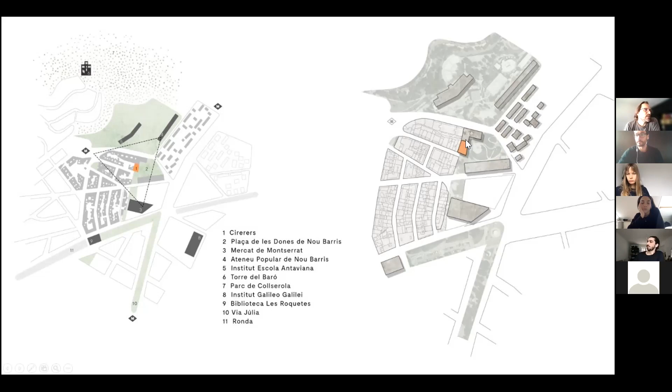So one of the main objectives of this project was to try to articulate these two kinds of cities that are very different, because we were just in between. So one of the main decisions related to this aspect was to maintain the skyline of this street with this kind of auto-promoted dwellings. Normally these are family houses where at the beginning it was one only property, and the sons and daughters were building upper stories, and now they are a little bit of a mixture.

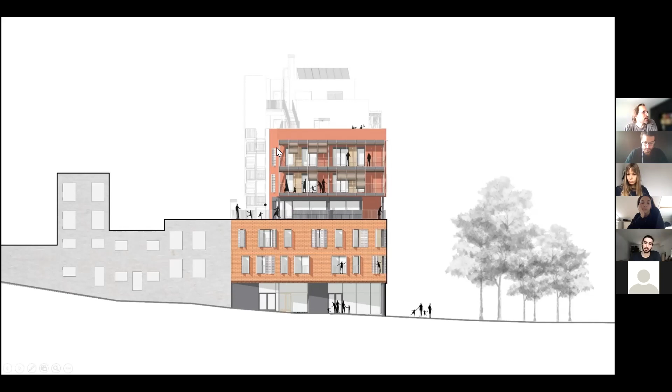One of the main decisions of our building was to maintain this skyline, and also a second decision, very important, was not to continue here with the party wall. We could have continued with this party wall up, but we decided to retire it so that we could offer to this street and to this neighborhood not a party wall that is blind with no texture and no life, but offer a real facade where there is a stair, an open stair, and windows of these dwellings. So these were the two main decisions.

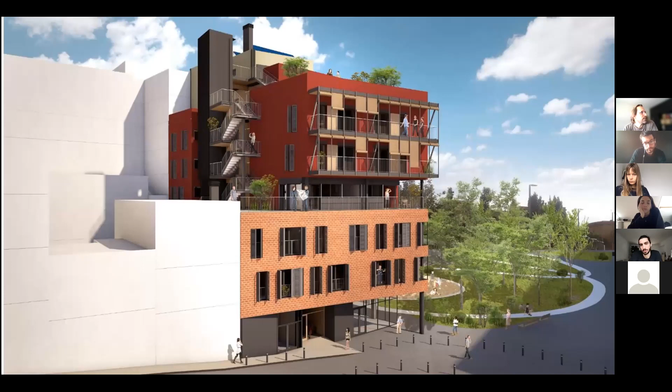Now it's finished. Last week we could certificate the finish of this building, and here you can see with these colors and textures this determination of how to deal with this connection in terms of neighborhood, and this color a little bit reflects also this intention. If we see Barcelona from the top, we will see mainly two colors.

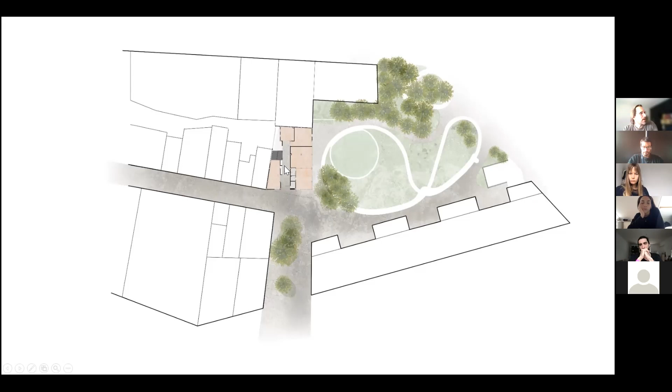What is the objective of all this? This ground floor is designed so that this interaction between the neighborhood and the community is possible and visible. Also interesting is that the street tile that we have in Barcelona gets into the building, into this corridor you can see here in gray, and it continues upstairs. We will see this now.

This is the landing of the stairs, and from this place you can enter the different apartments, which we don't call apartments, we say privative spaces, but I'll call them apartments so it's easier now. This street landing zone wants to be a space of extension of these privative spaces.

Most of these dwellings are very small, about 40 square meters, and this street landing area we're talking about is also 40 square meters. Here we have the clothesline and washing machines, so people come out to do the washing and hang clothes. It wants to be like a street, the typical Mediterranean street of a village where children play and old people can sit with a chair and table to play cards.

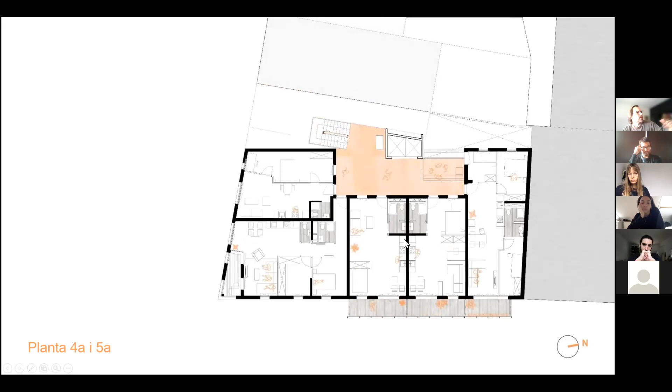This is the 4th and 5th floor, where we've detached from the wall that borders the building next to us. As we go up to the 6th floor, the building retreats and moves toward the mountain, following the slope of the north side of the city where Collserola, the mountain, is located. The urban regulation permitted a 7 or 8-story building, but the stories had to follow the slope of the mountain.

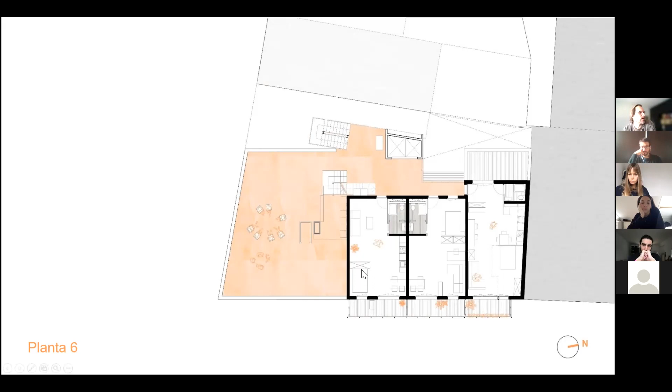For instance, on the top, the 7th floor, we have a gardening space, or community gardening space. On the 6th floor, there's a space to eat and even cook, and to have fiestas — you know, Mediterranean culture.

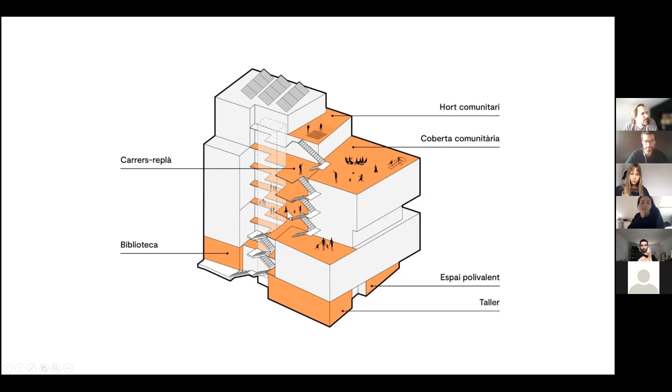And on the 3rd floor, there is another space. Nowadays they've focused it into a space for children on this intermediate floor.

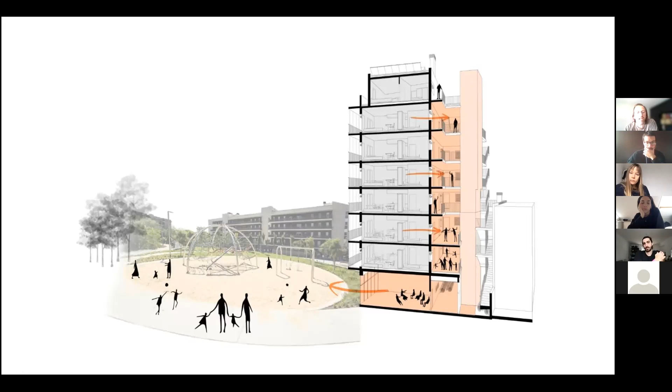Here are some images of the building when it was still only in wood, with the community that will be living there. These people participated not only in the design process, but also visited the works and took part in all the different stages.

Finally, related to the community's engagement and Celobert's commitment to the climate change crisis, we focused on two main strategies. One is related to the use of organic materials and dry construction systems. This decision is very important in terms of economy — we can talk about it later if we have time. The main materials of this building are low carbon, or even positive carbon, materials.

The main material is cross-laminated timber. At this time it's the highest timber building in Spain, though this won't last very long since there are new projects of 8, 9, 10-story buildings. You have to think that in Spain, construction in wood is something very new, nothing like in North Europe.

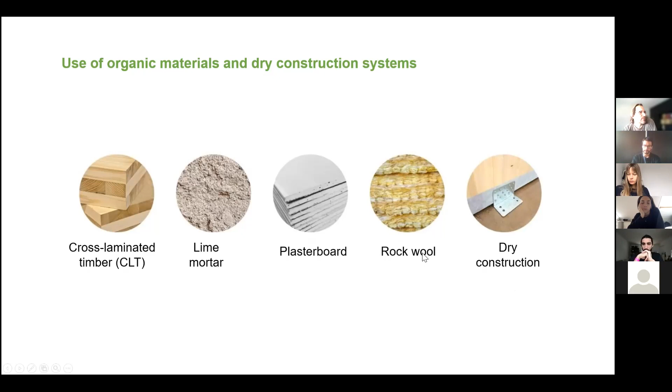Mainly cross-laminated timber, lime mortar in the facades, plasterboard in all the partitions, rock wool and fiber wood for all the insulation — acoustic and thermal. This is also quite special about this building: the commitment to dry construction, so that when deconstruction and recycling have to be done, it's easy, low energy demanding, and really recyclable.

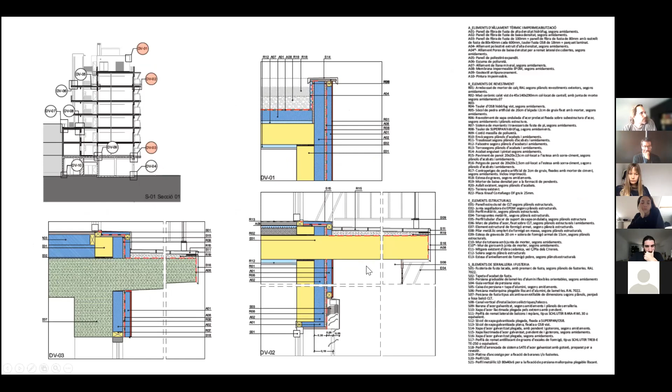Here's an image of one of the apartments before finishes, and another image of this building from the square I've been talking about. Some images of the structural function, and some images of the executive project. Afterward we can talk about all these issues if they're interesting for you.

Here are some images of this dry construction system. All this you see is like a substructure made of paper with gravel introduced inside, placed here because of acoustic requirements.

Here are other images of these wooden spaces. Before closing with plasterboard, all the insulation, the acoustic insulation that has been required here was installed. At the end of the day, the only part of wood visible is the facade wood, because the facades are the element that has less acoustic requirements.

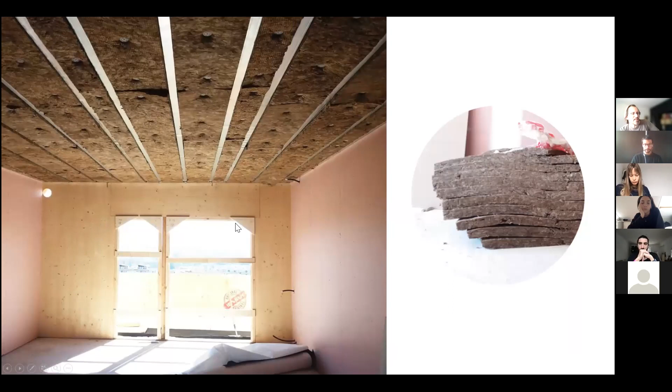Finally, another important issue, apart from the materiality of the building and all the other aspects, is all that is related with minimum energy demand. In this case, our building has been designed with passive house criteria. We are talking about compactness and insulation, a big amount of thermal insulation.

The airtightness means the tightness to the passage of air. Each apartment by itself is tight in terms of air passage. All the apartments have cross ventilation.

We have solar energy, photovoltaic energy, solar on the roof that is community, a community installation. Another very important element is solar control, elements that permit solar control, very important in our latitude. And also the double flow ventilation system that allows this building to not have a special climatization system.

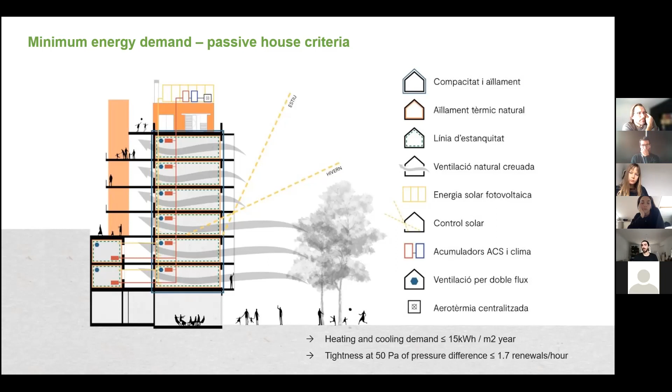In terms of energy demand, if we compare this building's consumption with what is established by the Technical Building Code of Spain for near zero emission buildings, we are reducing the primary energy by 50%, which is the maximum that this Technical Building Code establishes. But if we talk about non-renewable primary energy, we are doing things better by 80%. The non-renewable energy required is 80% less than what is required by our law for near zero emission buildings.

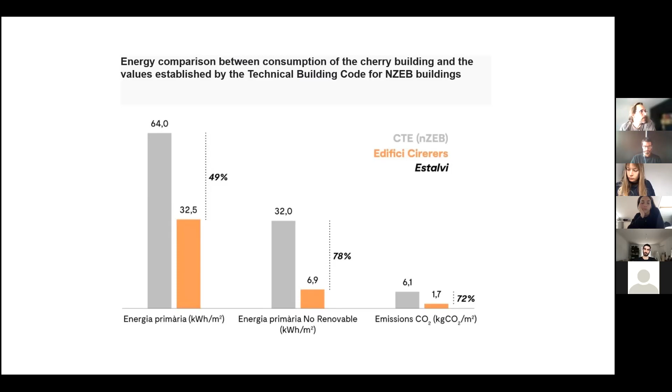In terms of intercooperation, this project follows a logic that belongs to the whole cooperative system, trying to make all the societies and the economy surrounding this construction a cooperative, non-for-profit economy, with the idea of constructing a social market, not a capitalist market. In this example, Sostre Civic is the real estate company, a cooperative doing all this with these users, and all the technical team are cooperatives. We're talking about the team of Sostre Civic that has promoted this building.

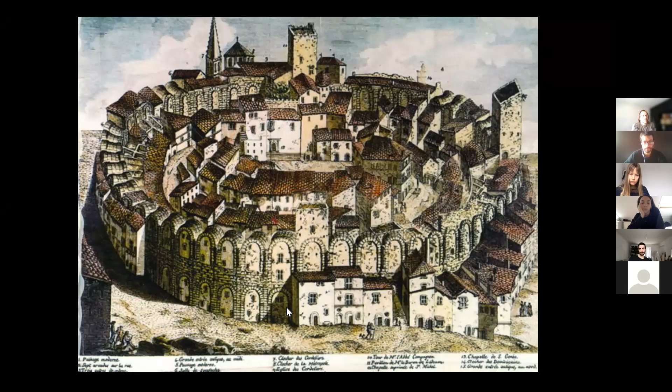So I would like to finish a little bit with this image of Arles, a village in France. I don't know if you've heard about it. This is an image from around year 500, 400-500 after Christ, and it shows a little bit the reaction of society to the collapse of the Roman Empire.

So I don't know if we are close to a collapse or not. There are many people that think we are very close to a collapse. But what this image shows is that cities have to be rethought, have to be reconsidered, because life is going to change very fast. And the role of Celobert cooperative is to help find solutions to be more resilient in terms of this global change that we are beginning to see.

And a little bit, I hope that this explanation and examples shows a little bit, put a little bit of light into this defeat that we have as society, that it's not easy. So thank you very much.

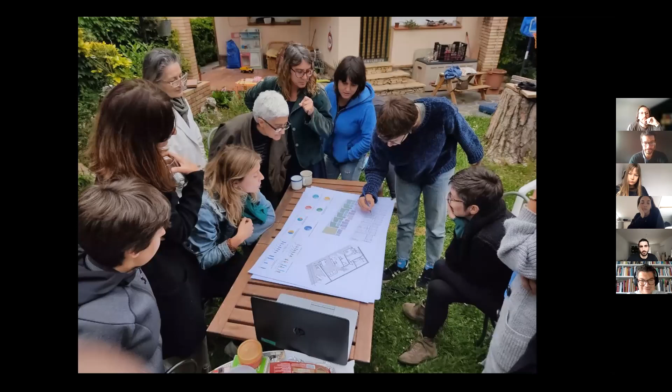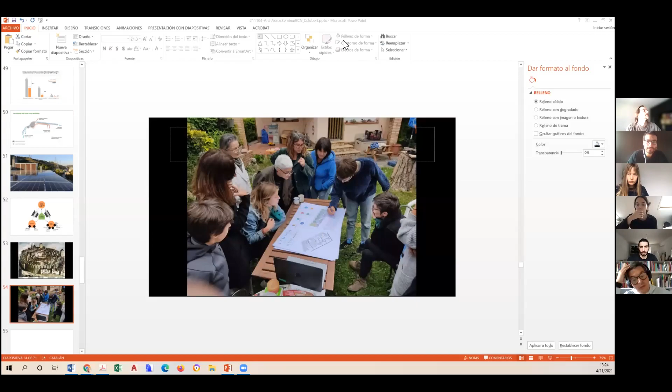Thank you very much, Diego, for your lecture. Maybe we can start with the first question, which is: since this building was occupied by dwellers very recently? No, it's not occupied. It's still not occupied. We finished, but now the municipality has to do all this paperwork to put everything okay so that people can arrive. But people will get into the building probably in February.

Okay, so my question was regarding the role of users, which you have talked about. Also, if you can develop a little bit, how has the group behaved as a group during that time? Because I imagine there's people coming in and out, people who become leaders, and maybe they don't have that much time to participate or they're not that much interested. So as an architect, from the discipline of architecture, how do you deal with all these social groups, which are ultimately the people you have to respond to with your design?

In this case, we have to think that it's different to work with a project like Sostre Civic, which has its own leadership because it's a big structure with a team that has strong power in terms of leadership of the process, versus if we are talking about an independent cooperative of people that are much more self-organized and things are much less stable.

So in this case, I would say the group has been very nice. It has been quite easy, I would say, because they have had to deal with strong decisions. For instance, at the beginning, the project had an underground floor for parking of motorcycles, bikes, and even some cars, because they wanted that.